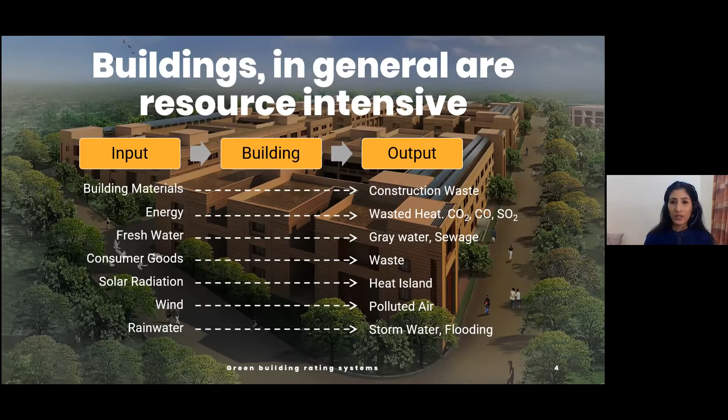There is lots of materials that go into building them. It takes energy to build buildings, it takes water during construction, and so on. And also during the operational lifetime, there's a lot of output in terms of waste, solid waste and wastewater, air pollution, and so on. So this is the nature of construction and buildings in general.

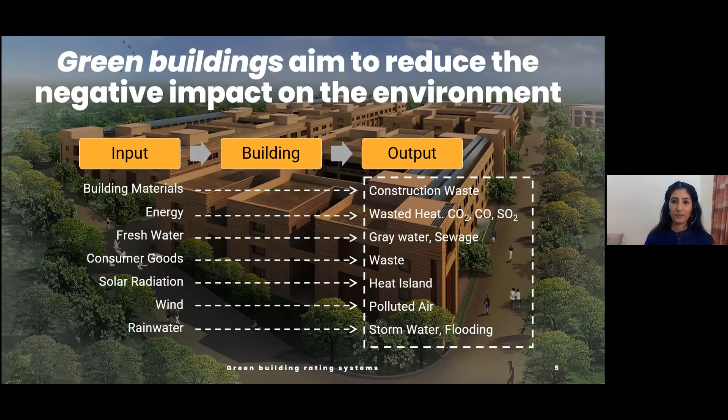Now, what green buildings aim to do is to reduce the negative impact. So the impact is there. Can we reduce the negative impact? That is the aim of green buildings. And yes, it's possible to do that. Now, the concept of green buildings, right? That's not new. I'm sure you all know that.

If we look at vernacular examples or old settlements from history, then we know that we always knew how to build buildings that keep people safe and also comfortable, right? In terms of the indoor environments, whether it's temperature, humidity, and so on. Whether it's India or even across the world, we see so many examples, which is a testament to the fact that we always knew how to design buildings, and by default, these buildings were green. Now, what we understand as green has probably evolved over time.

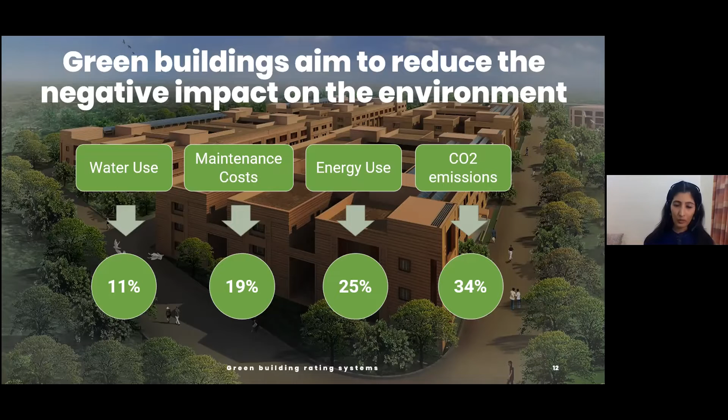But that's not true. And because it's not true, there is a lot of confusion around what is a green building. How does a green building really look? Can we define green buildings? What are the metrics that make a building green? And so on. So there is a rapidly increasing demand to create a formal system for defining green buildings, right?

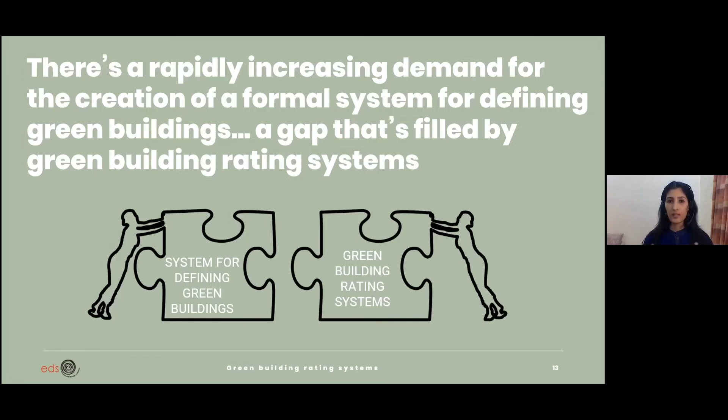Is it a building that only uses stone and mud? Is it a building that has to look a certain way? Is it a building that has to have certain things in place? What is it, right? And that's what rating systems help achieve, that it is a system or a guideline that helps verify that a building is green.

So it's a set of criteria which is given to a builder or a designer or owner, which when they follow, helps verify that their building is green. It gives a definition of a common baseline, right? Of what is considered green. So if you compare different buildings across the same rating system, then you know that you can compare across the same baseline. So there is some kind of a commonality which green building rating systems provide.

Further, it's also an assessment tool because it's a rating. So you're kind of rating, right? You're kind of measuring against certain baselines. So it's an assessment tool. And as we move on, we'll understand which are the criteria in which green features are assessed. And finally, to recognize environmental stewardship.

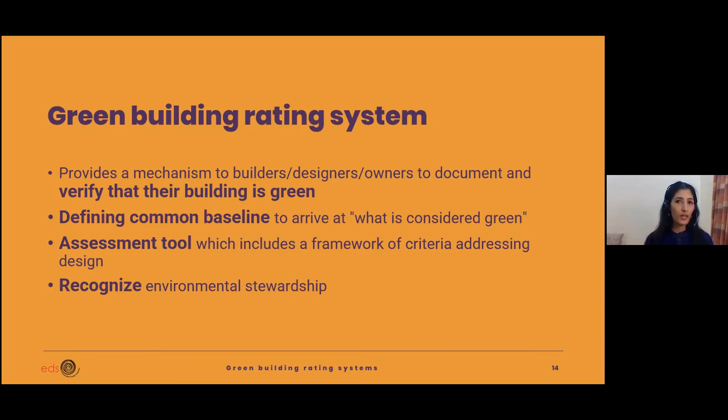This is also very important, where clients or owners are recognized for their efforts to showcase environmental stewardship, right? It does talk about their commitment to environment and their efforts are recognized, which is also a very motivating aspect in taking that extra step towards making sure that the building is really green.

Now, the goal of all rating systems is ultimately market transformation. This is really important, right? The majority of the buildings are probably following typical building practices, and you can't really call them sustainable or green. Whereas rating systems are pushing the market.

So, you move from a business as usual typical practice to a green building market where there is a demand for green building attributes, right? And that's what rating systems have successfully managed to do over the years and are continuing to do.

Now, an example is life safety. 100 years back, buildings probably didn't have life safety codes in place. But today, it's kind of unthinkable, right, to have a building which does not have fire suppression systems, for example, in place. It's a given.

Just like that, many green attributes become business as usual and a given. Over time, this is a market shift that happens, and rating systems make sure this shift happens rapidly, right? So they increase the pace of this shift.

And by doing that, rating systems have helped make several industry best practices become mainstream. A good example of this is using materials with recycled content. A decade back, it was probably a little bit of an effort to find such materials which would have recycled content in them and also have the supporting documentation.

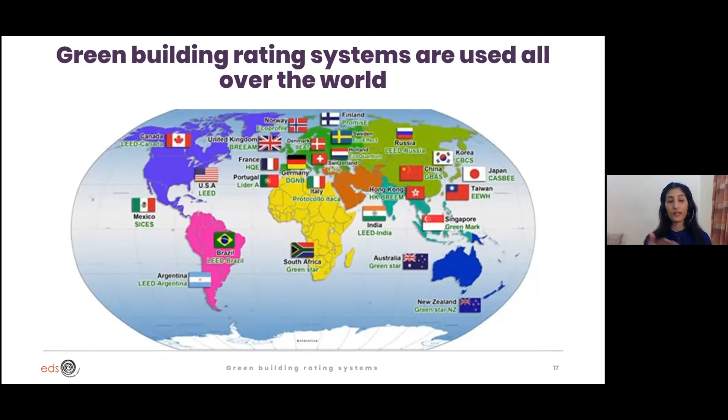Now let's talk a little bit about the movement in India, the green building movement. It started with the establishment of the Indian Green Building Council in 2001, right? Now we are in 2021. It's been two decades since IGBC was established. And this marked the green building movement in India.

So at that time, this building was the first platinum rated building in India, and it flagged off the green building movement, I can say. So if you wanted to look at a model contemporary green building at the time, then this was the answer. It had all the green building best practices possible integrated into this project. So in that sense, this building is very iconic. So that was the start of the green building movement.

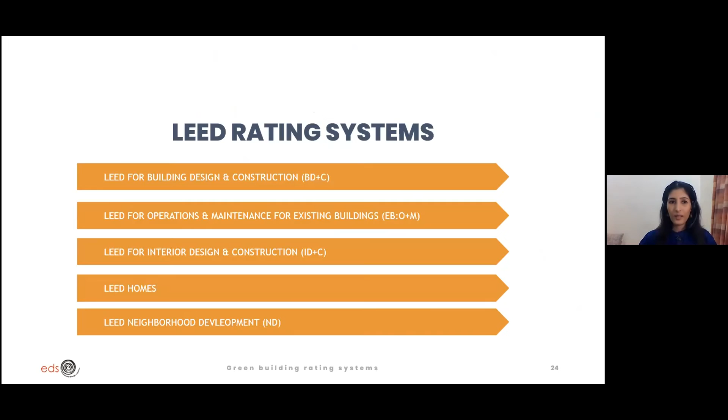Now, GRIHA doesn't have such an exhaustive list, but depending on the size of the project, you have different rating systems. So GRIHA itself is for all new buildings which are greater than 2,500 square meters. For smaller buildings, they have SWA-GRIHA, and then for large master plans, they have GRIHA LD, or large development, and then housing, and so on.

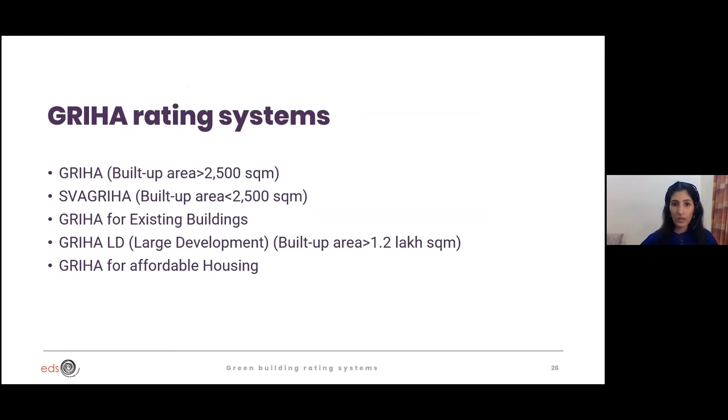Now, since it's a rating system, there are certification levels. For LEED and IGBC, you have certified, silver, gold, and platinum. These are the 4 levels of rating systems. And for GRIHA, you have star rating. And all these 3 ratings are point-based systems. You score out of 100, and depending on the number of points you score, you can get certified, gold or platinum levels. And similarly for star rating, depending on the number of points that you score for the project.

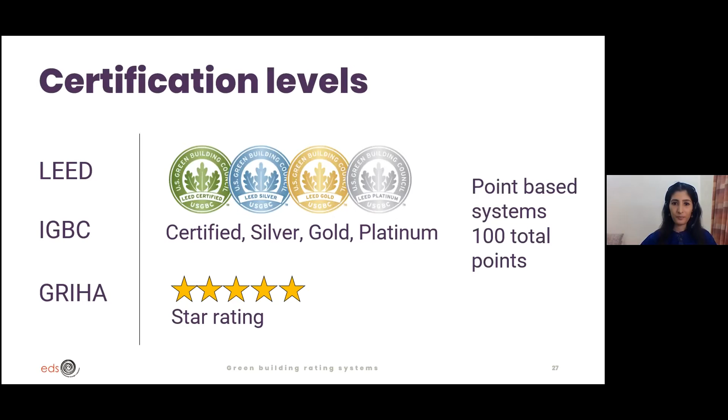And then you also have green building professionals, like LEED professionals, who help, just a second. Yeah. These professionals help projects achieve certification. They guide a project team in how to go about meeting the requirements in the specific rating system. So you can see for LEED, it's a 3-tier system of professional credentials, starting with Green Associate, then LEED Accredited Professional, or LEED AP, for different specialties depending on the rating system, and finally LEED Fellow. So rating systems are not only creating a demand for green buildings, but also skilled professionals.

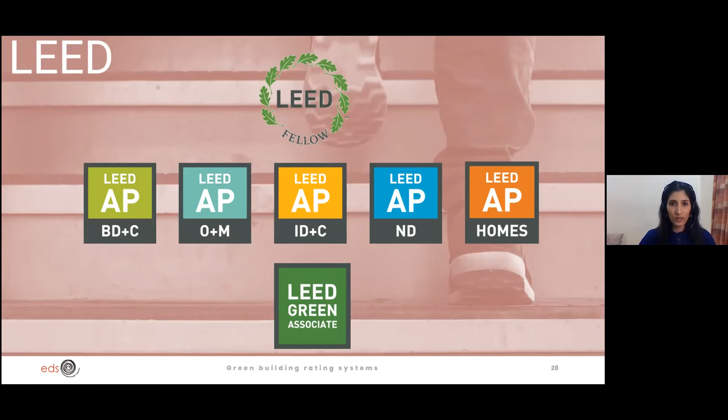Similar requirements exist for IGBC, where there is an IGBC accredited professional. And for GRIHA, you have GRIHA certified professionals, GRIHA trainers, and GRIHA evaluators. So all of these professionals are knowledgeable about the rating system, and they help facilitate the process.

Now, if we look at the credit categories covered in each of the ratings, I just want to throw some light on this: at the end of the day, they are all very similar. Whether it's IGBC or LEED or GRIHA, the structure may be slightly different, but they largely address the design of the building. So you can see in IGBC on the left, there are categories in the rating system. For example, the new building rating system addresses architecture and design of the building, site selection and planning, water conservation, energy efficiency, building materials and resources, indoor environment quality, and innovation and development.

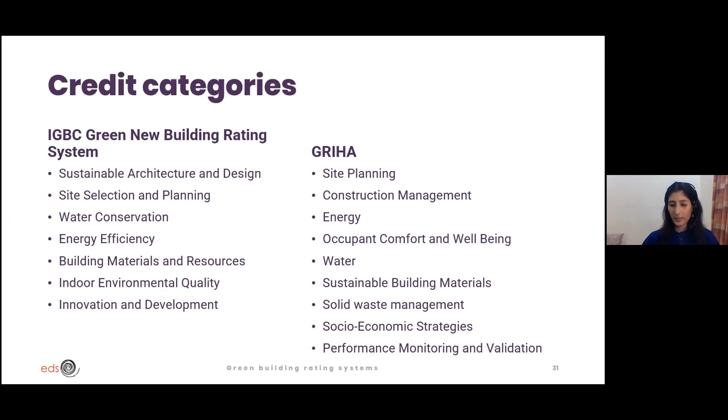On the other hand, GRIHA, on the right side, also looks at site planning. It looks at energy, water and materials, and also indoor environment quality in terms of occupant comfort and well-being. So at a high level, they all address the same aspects of building design, construction, and occupancy. In LEED, it's called core concepts, and LEED addresses location, site, water, energy, material, and indoor environment quality. So in a nutshell, rating systems address design, construction, and operations and maintenance of a building. It's the whole cycle. But there is a lot of emphasis on design, especially for a new building rating.

Now, whether it's a new building of any kind, whether it's a home, or interior design and construction, or an entire new building, design has a big focus. It sets the direction for the rest of the 30, 40, 50 years of occupancy of the building, and it is the root cause of a lot of environmental issues. A bad design will remain a bad design all its life, and no matter how good the technology you have in the building, it's only an add-on. Good technology is like a band-aid to a bad design. So you have to get the design really, really correct.

And so a lot of the emphasis of rating systems is on getting the design right, from site selection to site planning, landscape, how the building is designed, how the materials are selected, the way daylight is in the building, thermal comfort, and so on. And of course, there is some emphasis on the construction aspect, and then what happens to the building after it is occupied.

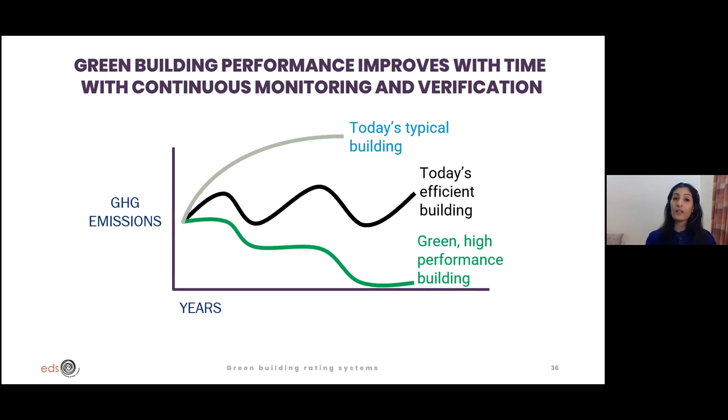Now, having said that, there are some limitations of rating systems as well. Starting with, it could be expensive. Now, you may want to remember that all rating systems are voluntary, they're not mandatory. So projects that aspire to be certified, or those who go for these rating systems, they have some aspiration or maybe a requirement in place. So it is really a voluntary decision taken by any project team, and there is an expense to it. You have to pay the registration and the certification fee, so it comes at a cost. So sometimes it could be expensive, and there could be budgetary constraints.

It could also happen that a project team is only driven by scoring points, and the motivation to truly make the building green may or may not be there. Sometimes, depending on which rating system it is, there can be a lack of regular and consistent updates, and sometimes it's so technical that you could need specialized skills, and that calls for certain professionals on the team, right? And that also would mean that there is an additional consultant on board, and the rating system will call for more additional paperwork, right? It is also perceived as complex and technical, which could sometimes be a deterrent to adopt or look into a rating system.

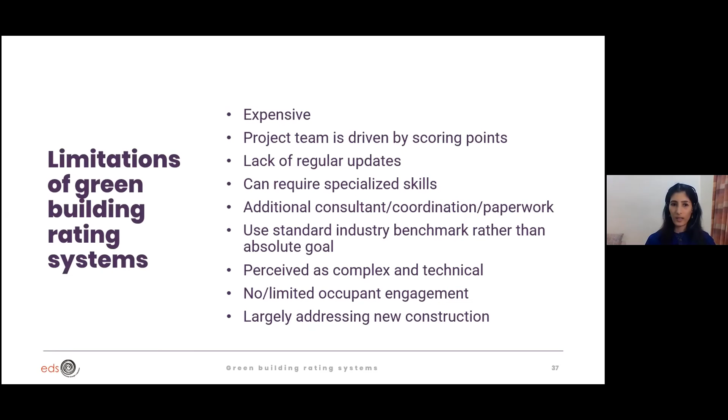There is no occupant engagement, right? This is really something that speaks to a design team, and the occupants rarely know that they are in a green building, or rather what to expect from a green building. On the other hand, the ratings for existing buildings speak to the people who operate the building and not exactly those who are daily users of the building. And yes, it largely addresses new construction, which has been kind of taken care of now in the rating systems, the way they are evolving. So that's the last point I had kept there, that it is a limitation, but not that big a limitation. So that brings me to this timeline.

I really like this graphic. It shows the green building movement, or the journey, in the first 25 years. The first rating system that was launched was BREEAM in 1990. This was launched in the UK. And then the US Green Building Council was launched in 1993, right? So as such, we are looking at a three-decade journey of green building rating systems. So they have gone through certain evolution over time, right? So this is a tried and tested and continuously evolving mechanism which is out there, and it has been widely accepted in the industry.

So you can see here, 1993 is when USGBC was established, and then LEED was launched in 1998, and just three years later, in 2001, is when the Indian Green Building Council was formed. So you remember, right? We just talked about it. So that means around 10 years after the first rating system was launched, the Indian Green Building Council was launched. Around the same time, the CASBEE rating system in Japan was launched.

And if you move further, in 2004, LEED for Existing Buildings was introduced, right? Until then, it was all about the new buildings. And then some of the more significant things are like in 2006, Living Building Challenge was launched. This is a separate rating system, and by far the most stringent out there, with requirements that really push the project team to think beyond the obvious and really push the envelope.

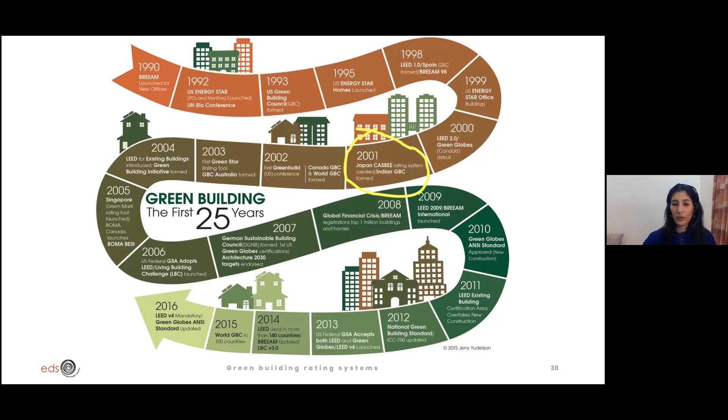So let's move on to 2010, when Green Globes was launched. And then if you move on to 2014, then you have LEED used in more than 140 countries. So clearly, as a movement, there is more acceptance of a rating system like LEED. And finally, in 2016, LEED version 4 became mandatory. So the newer version. So you started with version 1 in 1998, and then in 2016 it came out with version 4, right?

So in this whole evolution of three decades of rating systems having been there in the industry, the trend is moving from doing less bad, that's how it started, to doing more good. What it means is it's not enough anymore to say that my building is 30% better than an average building. That's not enough. It's been three decades, and we have to move beyond that. It's all about how the building is doing more good. So an example of that is, rather than saying it is 30% more energy efficient than a baseline, it's about asking whether the building is energy positive, right?

It's not so much about diverting 50% of waste from landfill, but it's about saying, is this a zero waste facility? What can be done to achieve that? It's less about having a native landscape and more about restoring biodiversity, right? It's less about having just good light versus what is the impact on occupant health and wellness? What's the air quality in a building? What is the color rendering index of the light fixtures and so on? So this is what it means by moving from doing less bad to more good.